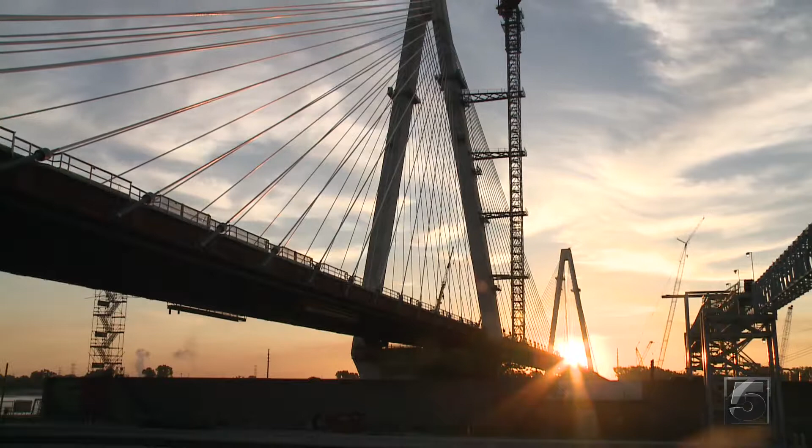It's a structure years in the making, a new gateway to the West. Like history is going to be here after I die, way long after I die. One generation's grand undertaking, built with muscle, sweat, and tears. He was a very good dad, very good son, and he was a very good worker. A tribute to a man who gave his best, and to countless men and women who represent America's best. Stan Musial and vets together, there's nothing more Midwest. Simply beautiful, strikingly complex. We could sit back and we could reminisce on, hey, we put that together. We poured that concrete. This is the making of the Stan Musial Veterans Memorial Bridge, a landmark of legend.

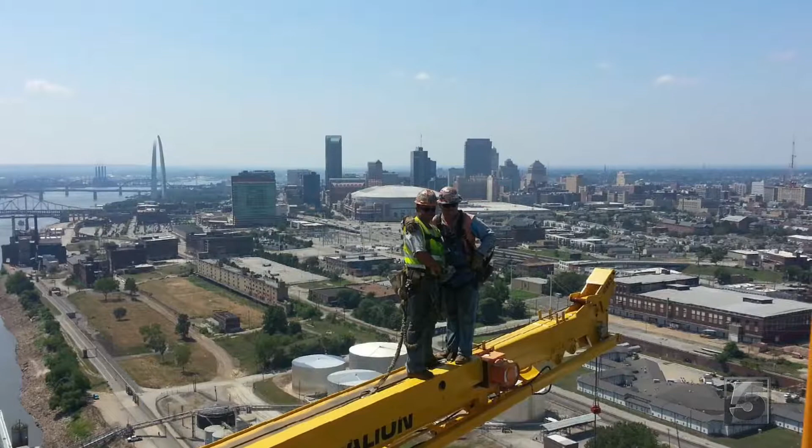On this day, they share a few photos. What do you call them? Glamour shots? Captured from their unique perspective. Pretty much when you're building something, you remember setting almost every piece of it.

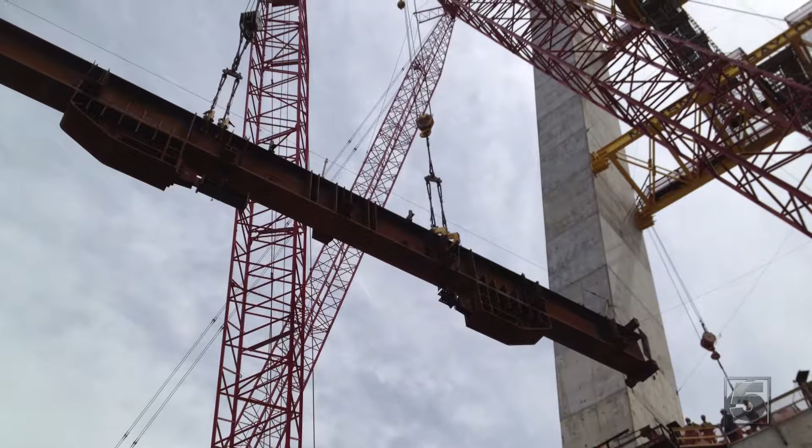Photos freezing moments of tension and suspense. You look at the numbers and it looks right on paper, but they were like 97, 98% capacity. 167,000 pounds, I think that piece weighed, and you transferred it between 3 cranes in the air.

Or just hanging out. I just got those two over there and they're talking. It's kind of neat seeing us, not in any kind of pressure, just kind of hanging out on the iron. Memories that will last a lifetime.

We had a family day down there, and I got to bring all my nieces and nephew up there with me, and we all got us some pictures up there. That was really, they kind of understood kind of what I did then.

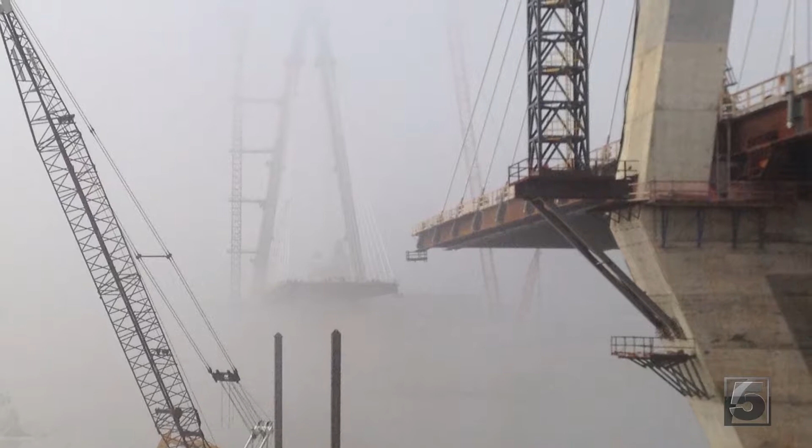A structure that will last for generations. And you always catch yourself when you're walking out to your truck at the end of the day, you look back and look up, see what you did, take a second and say, well, that was pretty neat.

The $700 million project started in 2010, right in the middle of the Mississippi River. But years before the bridge started to take shape over the river, there was work being done under the river.

It's late in 2010, and workers are busy laying the bridge's foundation. Their first priority, building coffer dams around each of the bridge's 2 bases. The dams not only provide a place to work, but also give workers access to their unique job site.

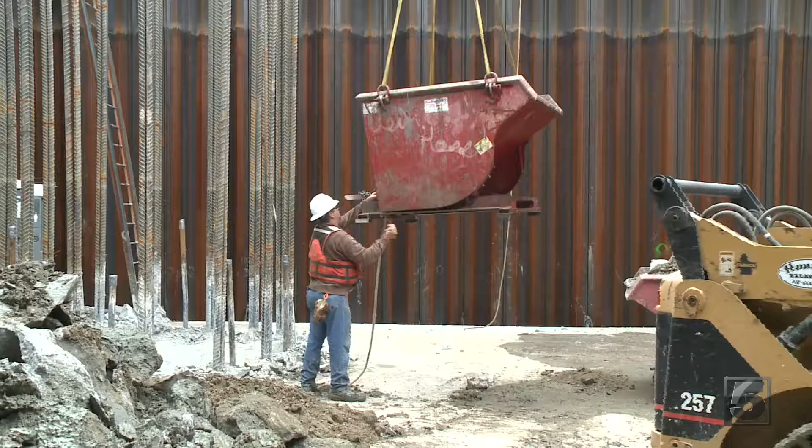Greg Horn works for the Missouri Department of Transportation and is the project's director. Right now we're at the bottom of the coffer dam. We're about 25 feet under the water. We're actually sitting on the floor of the Mississippi River.

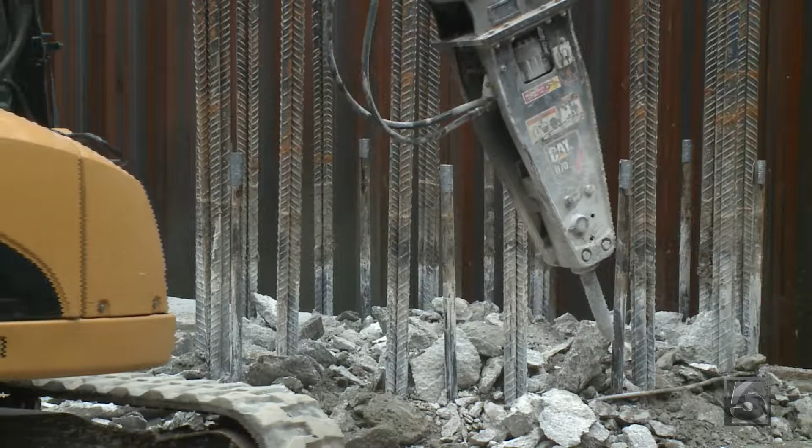Workers have drilled 6 shafts to support each tower. Tons of concrete, reinforced with tons of steel. They're 100 feet long. These clumps of 3, each one of those 100 feet long weighs about 2 tons. So when they set this in place, it's pretty amazing. They lower that down, and they have bands underneath that are all tied together every 1 foot, though you don't see them here.

Sheets of steel wedged down into the riverbed create a precarious workspace. There's always going to be water in here. You can never get these perfectly sealed, but by raising up this working pad, they're able to work on something without being stuck in the water all day long.

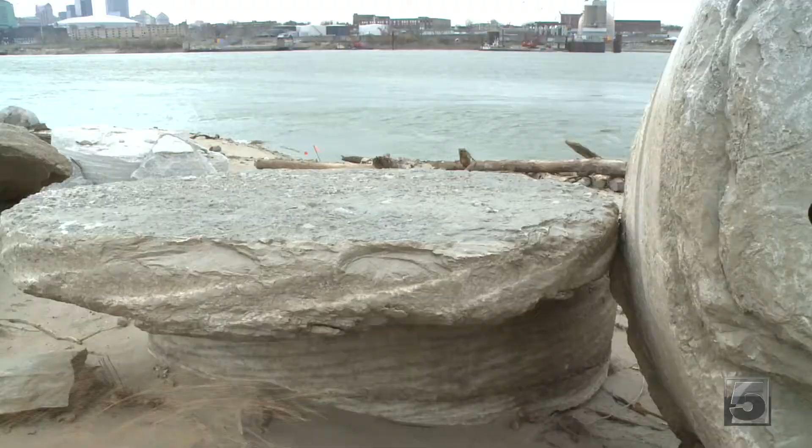Workers will spend months inside these coffer dams, constantly aware of the changing river levels and the risks they face. And so you're standing down there looking up. You can see the rust line when you're down there where the water is above your head.

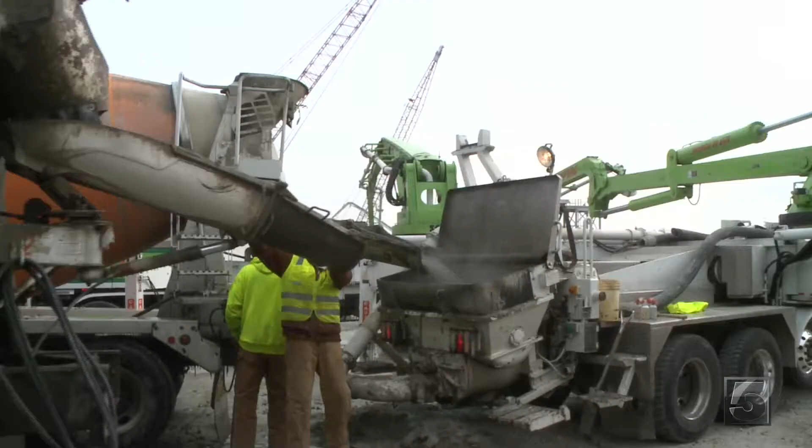And as the weeks wear on, the bridge's bases begin to take shape. Pouring concrete into the Missouri Tower seems like a never-ending process. They started last night at 1 o'clock. They'll end today probably at 3 or 4 o'clock this afternoon. So it's a 14, 15-hour pour.

And the December weather is just another reminder that Mother Nature can be a help or hindrance. Engineer Randy Hitt is the project's assistant director. Freezing rain and ice on the slippery barges makes it a little more hazardous, so a lot more caution has to be made to clean that off.

Despite the cold, workers inside the coffer dam are carrying out the task of creating an intricate form made of rebar. What you're looking at is approximately 1.9 million pounds of reinforcing steel, a lot of reinforcing steel to hold up all the seismic and weight of the bridge. When complete, these two towers will support about 31 million pounds.

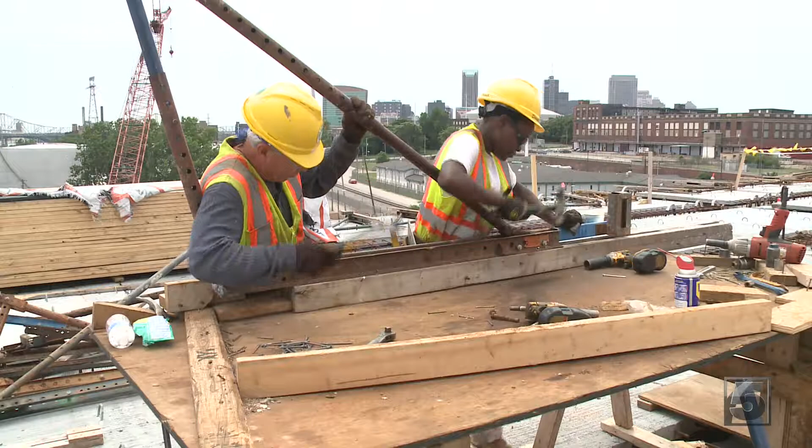As the towers of the new bridge begin to take shape, less than a mile east of the river, archaeologists labor to preserve what is old. Most of what we're digging are the remnants of everyday life.

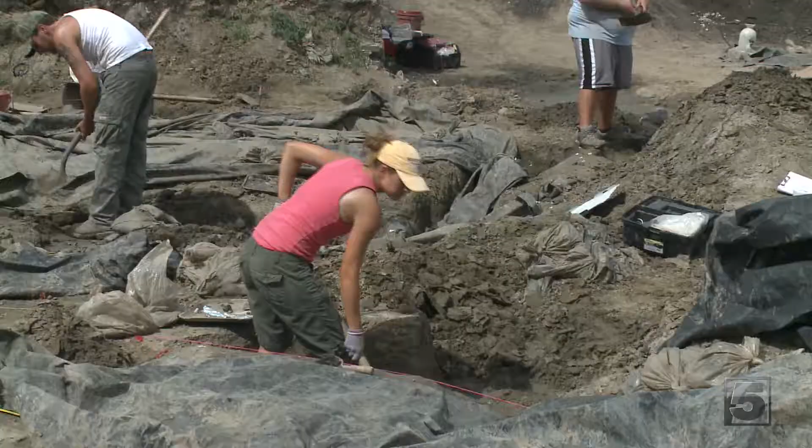Joe Galloy and crews from the Illinois State Archaeological Survey are fighting the clock. This is really sort of a once-in-a-lifetime opportunity because of where this bridge and the interstate connector is going. Thanks to a federal law that requires a dig be completed before the bridge is built, they hope to save what's left of an ancient community entombed on the outskirts of the Mississippi.

We're standing on the northern end of a large prehistoric site. We call it the East St. Louis Mound Center. Crews started excavating the dig site in 2008. It is a very, very slow process. They've spent years scraping away at the dirt, hoping to unearth the past that's buried here.

No site is exactly like another one. And in fact, the percentage of what we really know about these ancient sites is very small.

For Galloy, doing what he's passionate about in the state he grew up in is as priceless as the history being uncovered. One of the questions I get asked when I tell people I'm an archaeologist is, well, what are you doing here? They assume that archaeology happens in exotic places like Egypt or Central America or China. I think part of it's just a lack of awareness that there was a rich, ancient Native American civilization here.

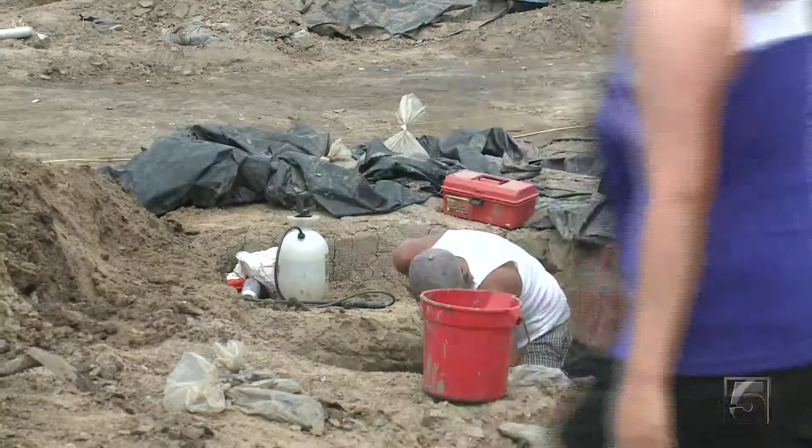Thanks to the dig, archaeologists now know that two separate groups of people at different points in history called the area home, the first between 950 and 1050 AD. The second group that came in were the Mississippian Indians, who built Cahokia mounds. The area was essentially a residential neighborhood, a suburb, so to speak, for a much bigger Cahokia.

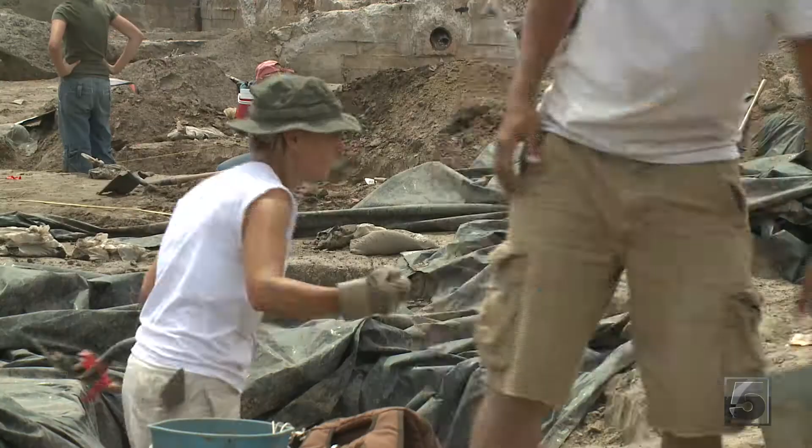That's an image that, in terms of archaeology, we just didn't know happened. It also backs up that even thousands of years ago, location was everything. We think it probably also functioned as a port city, an area where goods would come in and go out.

A few facts archaeologists may have never discovered if the new river bridge was never built. Finding these sorts of little tidbits of what happened helps produce a more complete picture of, say, how far Cahokia's influence was.

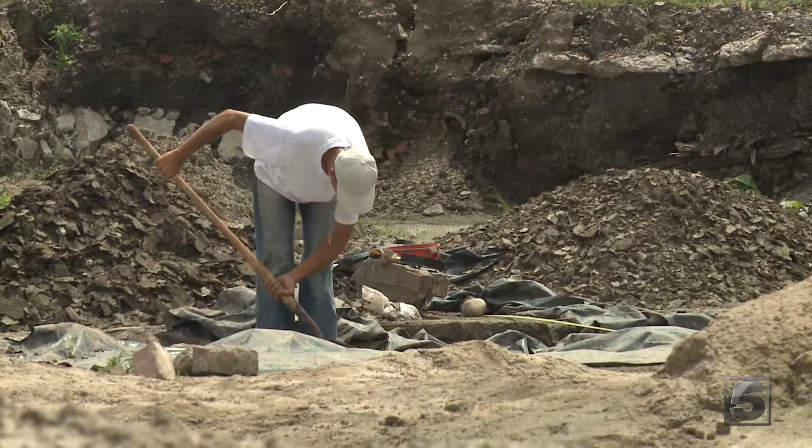The only problem is, the longer they get, the harder they are to ship. Constructing a monumental structure requires massive parts. Coming up, just how tricky getting those parts to the job site can be.

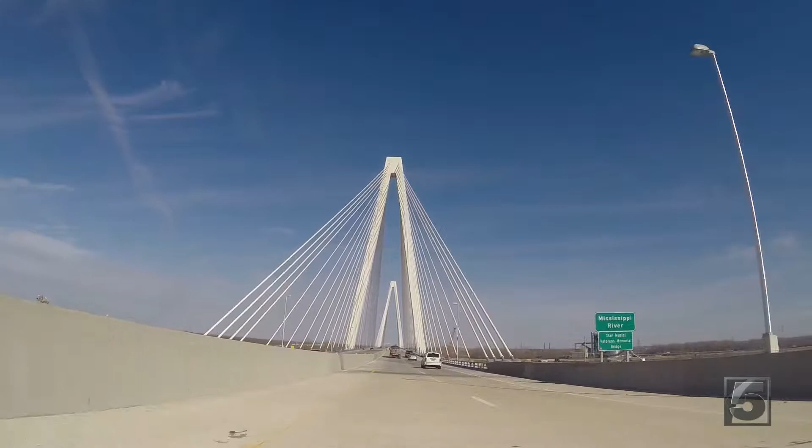The Stan Musial Veterans Memorial Bridge may be the newest bridge on the St. Louis skyline, but it's just one of many bridges in our city's history, from the McKinley Bridge to the MLK to the Poplar. Bridges were either built to get people into the city—over 100,000 people cross the Poplar Street Bridge every single day—or to relieve congestion on already existing bridges. It's a really great bottleneck, and now we see the problems that a bottleneck like that can cause.

But the city's first bridge was the St. Louis Bridge, better known as the Eads Bridge. Opened in 1874, it was built simply to connect the east to the west. Andrew Wanko is the Missouri History Museum's public historian. The Mississippi River had long been a difficult thing for people to cross, and steamboats were really the way to get things around. So this was incredibly monumental.

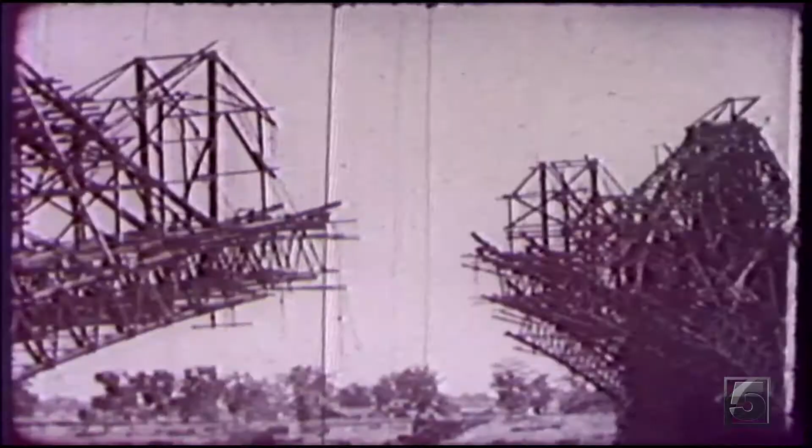The bridge was the brainchild of self-educated engineer James Eads. Considered a modern marvel, it was the world's first steel truss bridge. We look at the Eads Bridge now and think, wow, that thing is massive, it's strong, it's never moving. People looked at it back then and they were terrified of it. Since steel was a new structural material, people just weren't convinced it would hold up as promised. People were really afraid, and bridge collapses were pretty common at the time, even under the weight of just one train.

And so they were really worried this could be a huge failure and a black eye for St. Louis in the nation, a big embarrassment if this thing collapsed.

Eads, who never seemed to lack confidence, also had a knack for showmanship. He borrowed an elephant from a traveling circus and walked it across the bridge in front of a big crowd gathered on the levee. Everybody knew an elephant would never walk on something that couldn't hold its weight. And sure enough, it walked clear across to Illinois.

When the doubts lingered, Eads parked 14 locomotives in the center of the bridge at the same time. One by one, they drove off, and there were no problems at all.

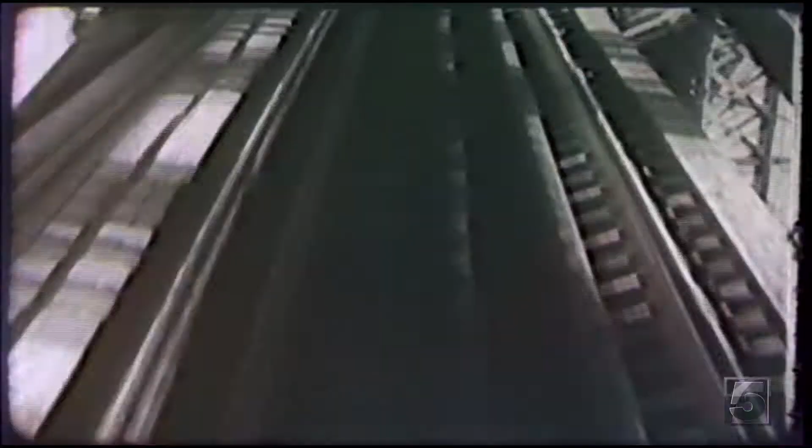The Eads Bridge originally carried rail and pedestrian traffic, but the railroads abandoned the bridge in 1974. By the early 90s, traffic had slowed to about 4,000 cars a day. In 1991, it closed, reopening two years later when Metrolink began using the bridge's lower train deck. The old bridge underwent a major renovation, and in 2003, traffic began rolling across the Eads Bridge once again. And the rest is history.

Once completed, the bridge will be the third largest cable-stayed bridge in the United States. And when you're building a bridge that size, just getting the parts to complete it is a very big job.

Building a bridge isn't just about building a bridge. You have to get to it to cross it. There are 31 construction projects, and it's all like a big puzzle. MoDOT's Greg Horn is in charge of making sure that each piece is put in the right place at the right time. This is just bringing one girder, one of 100 girders, onto this project.

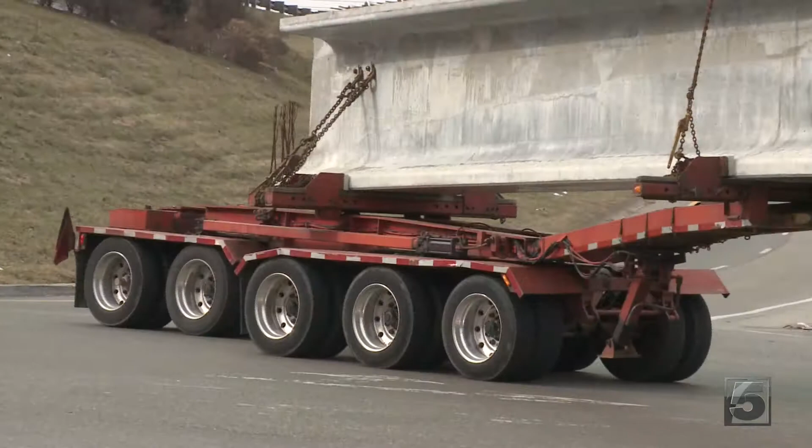In the spring of 2011, workers are maneuvering a 125-foot-long concrete girder from Interstate 70 down to the Missouri approach. The interstate's not as big of a problem as getting off at the interchanges and making it around turns. That's why the back wheels can turn also, so there's actually somebody in the front of the truck that steers the back, and somebody that steers the front. Horn says it's a move that will be repeated again and again.

Once on the job site, two crane operators work in tandem, lifting the bulky beam into place. Most girders typically only have one crane doing it, so the two operators have to work in conjunction with each other, which makes it more difficult.

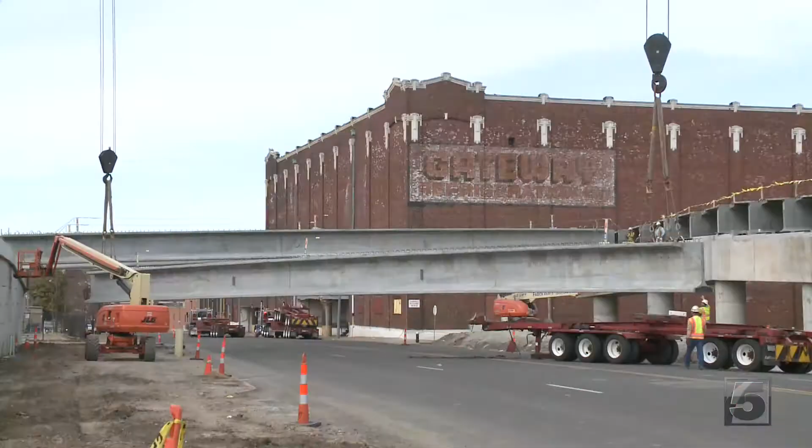Foot by foot, the crane operators negotiate their precious cargo forward. It's not a typical day's work, even for these skilled men. That's really hard when you have to walk with the crane rather than just boom over. Yeah, because then there's a lot of movement. It takes a good operator.

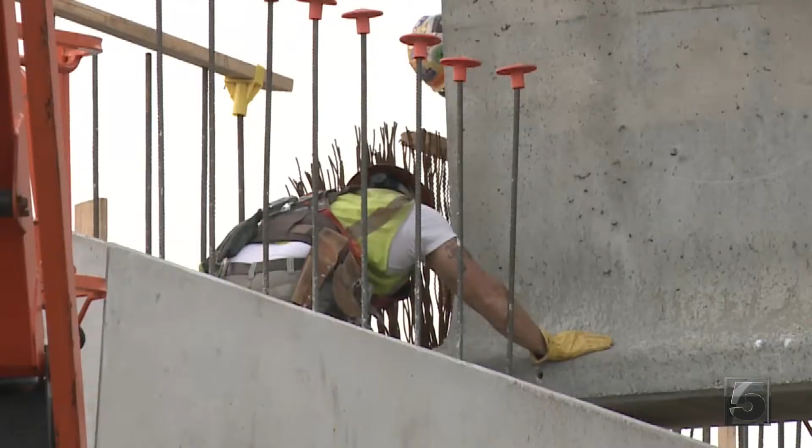More than an hour after its arrival, workers lower the beam into place. Teamwork is paramount. A lot of times crane operators can't see exactly where they're setting stuff down, so they have to look at the guys on top giving them hand signals. As soon as all the pieces are in place, work begins on another puzzle. It will be another four months before they pour the driving surface on the Missouri approach.

About 25 miles from the main construction site, in the heart of St. Charles County, right now we're taping this off so the concrete doesn't leak out, keeping it in the forms so that it won't fall and keeps the right level. Construction workers are putting in 8 hours a day, so when you're driving, you don't have any bumps.

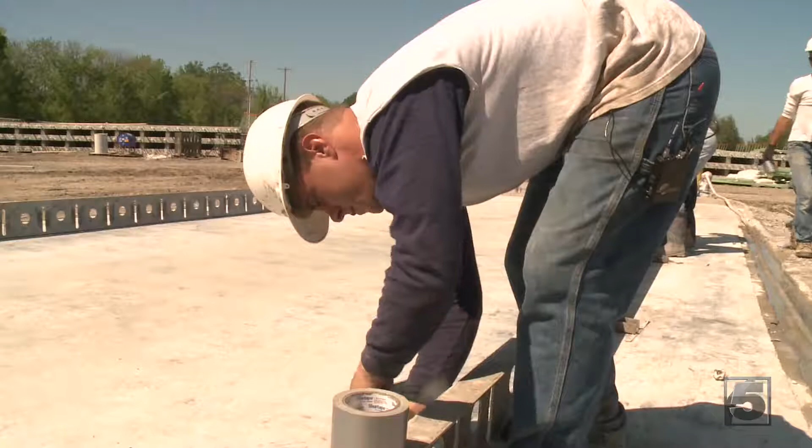Each adding his touch to the bridge. I've been building this bridge since last year. Ordinary guys like Dave Stewart and Andrew Leach tie wire, put it all together, bend steel and stuff like that, doing extraordinary things. They're part of the crew at XL Contracting, where workers are tying, pouring, and scraping.

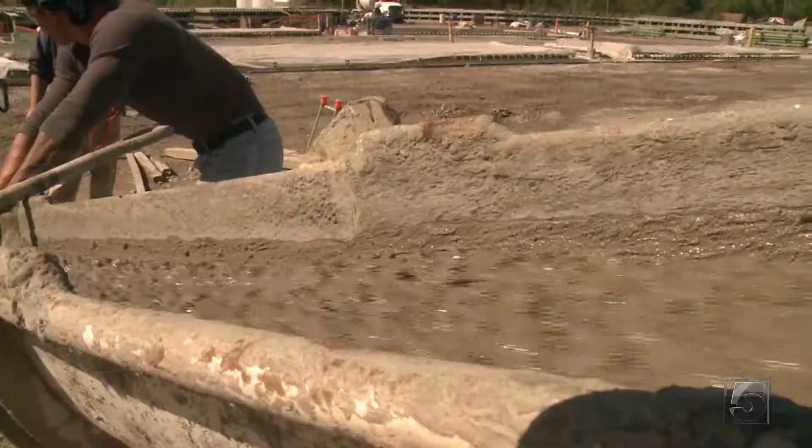Pete Allen is heading up this off-site construction project to build the bridge's underlayment. They are making precast panels, a lot of them, 456 total. There are 376 standard deck panels, some counterweight panels, and roof panels for the towers themselves, but 376 roadway panels.

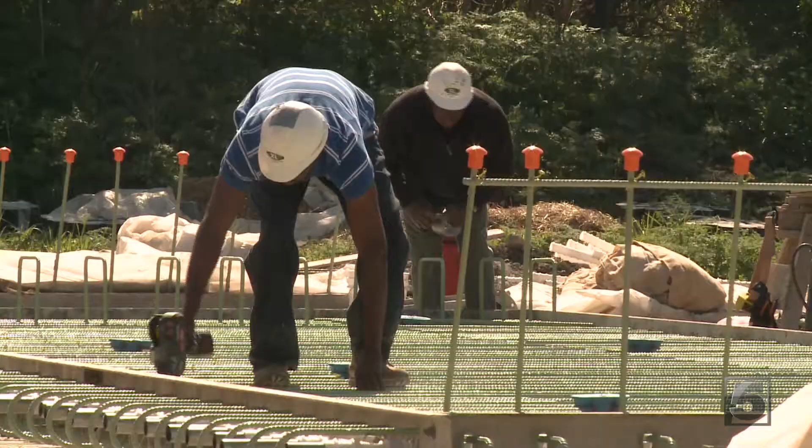Each panel is handcrafted and custom built for a specific place on the final structure. First, the form is laid out according to the diagram specs. Next, rebar is placed and tied off. After the work has been triple checked, the slab is poured and floated.

It's repetitive, painstaking work. We've hit as many as 14 in a week, but it's usually 8 to 10 a week, depending on rain days. But to these men, it's worth it.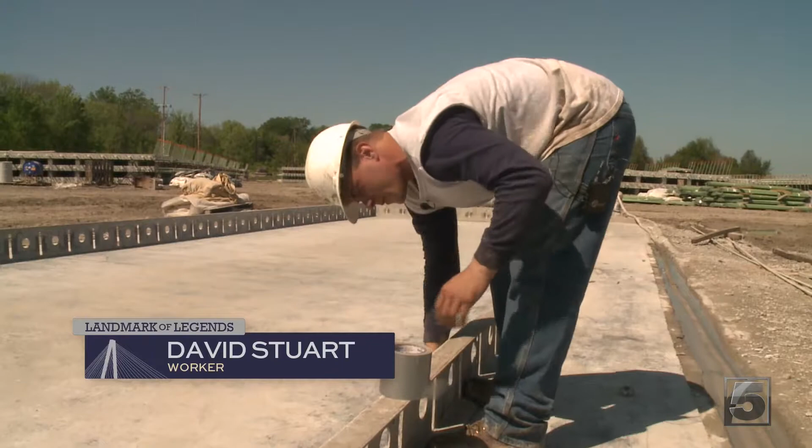They're helping to build history, especially when I drive over it too. Get to drive over and see that I made this. That's always good. Something you can tell your grandchildren you were part of, knowing you did a good job and that it's built safe for everybody else.

They all realize it's a once-in-a-lifetime opportunity. I'm still pretty early in my career as a civil engineer, and to be working on a project of this scale right off the bat—I'm 4 years out of school and working on one of the biggest bridges in the Midwest right here in St. Peters, Missouri.

It's pretty neat. Once completed, the panels are cataloged and stacked. The first ones built will be the last ones laid into place on the bridge's deck.

I saw how a bridge is being constructed, which is like a blast for me. Out of the classroom and down to the river. Coming up, engineering students get a glimpse of their future.

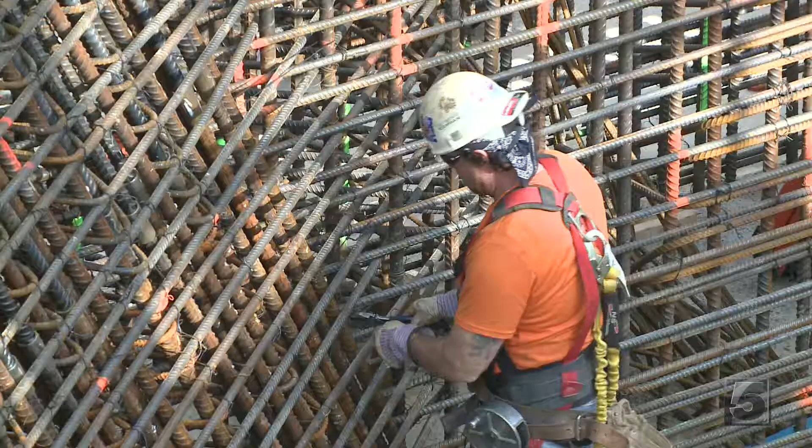It's early March 2011. The cofferdam is completed, and construction continues. The footing is poured. But now conditions are a little different—before, most of the other stuff was all underwater, and now we're actually coming above water. For the first time, the towers are beginning to take shape.

Now you've got the tower steel coming out of the footing, and they're getting ready to form up for the first concrete pour. For weeks, iron workers craft a steel cage, making sure each piece is perfectly placed. Small errors can quickly turn into large problems. It's actually like a big puzzle trying to fit all this reinforcing steel into place, trying to get it all lined up right.

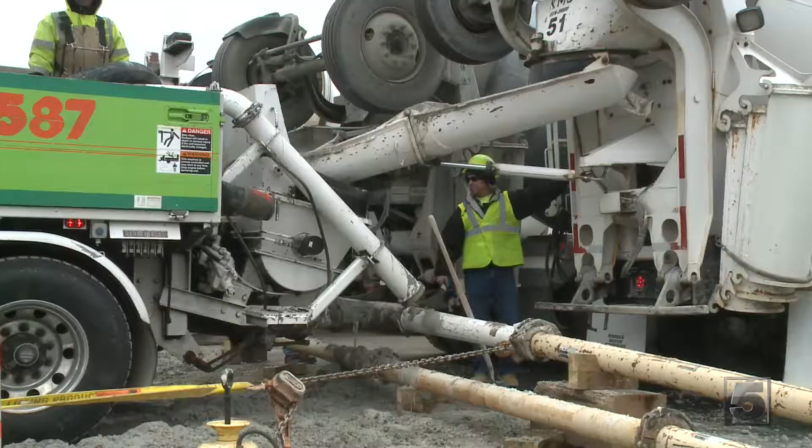A wooden form is built around the structure in preparation for the largest concrete pour of the entire job. Before it's done, workers will use enough concrete to pour what amounts to roughly 3,600 backyard patios—probably 400 truckloads, pumped from the trucks through a maze of tubes and into the cofferdam. All the people down there, you can't even see them—they're down in the bottom mat of steel, moving these hoses around. What took 2 days to complete will take 2 weeks to cure.

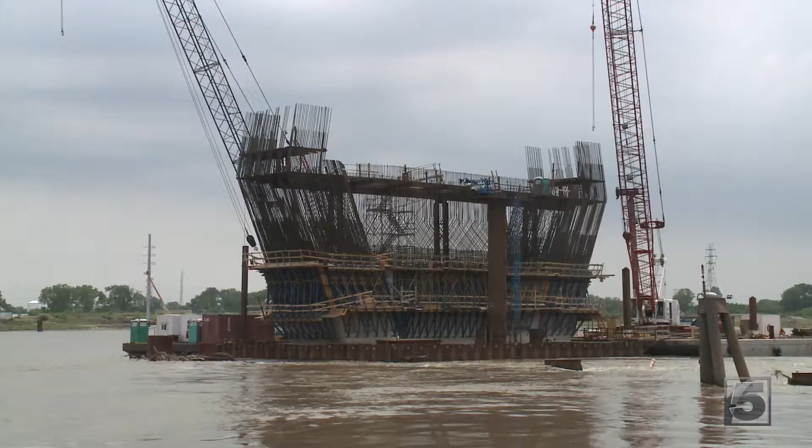It's a process workers will repeat 6 more times before the base is finished. They'll pour to this flat surface down here today, and then they'll tie more steel into it. The tower progresses up from there, so all this steel will be sticking out of the concrete. When this phase of construction wraps up, the base of the tower stands nearly 75 feet tall.

St. Louis hasn't had a new bridge since the 1960s. It's provided a rare opportunity for students who hope to one day build bridges of their own.

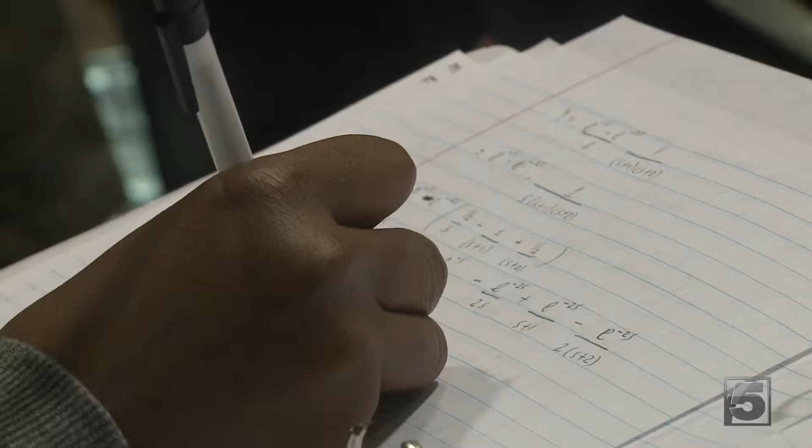For students in the University of Missouri St. Louis Washington University Joint Engineering Program, this would be a piece of cake. But today, the future engineers are leaving the books and blackboards behind.

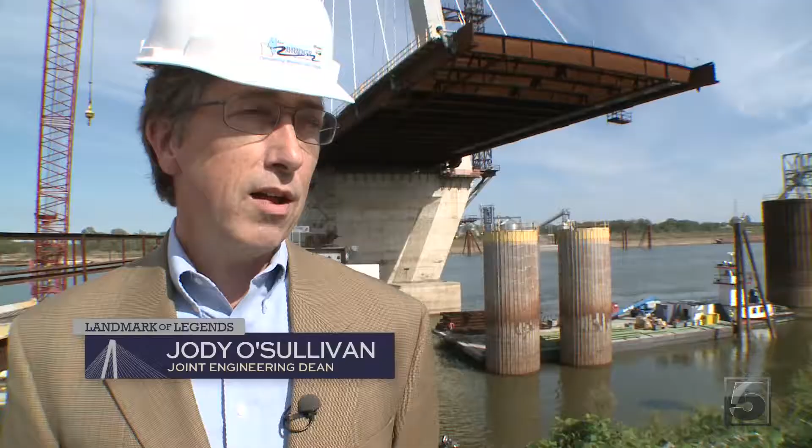So this is what the bridge is going to look like when it's done. Taking class on the road, this is a great opportunity for students in the Joint Engineering Program to come out and see engineering in action. Here's I-70—they're getting a firsthand look at what it takes to build a bridge, not only the design process, but the actual result of the design, the actual build.

It's a chance for civil engineering major Yahya Al-Assadi and other engineering enthusiasts to get a glimpse at what they hope will be their lifelong careers. When I decided to become an engineer, people asked me what I wanted to do, and I said I want to build bridges and buildings. So I tackled the first one today.

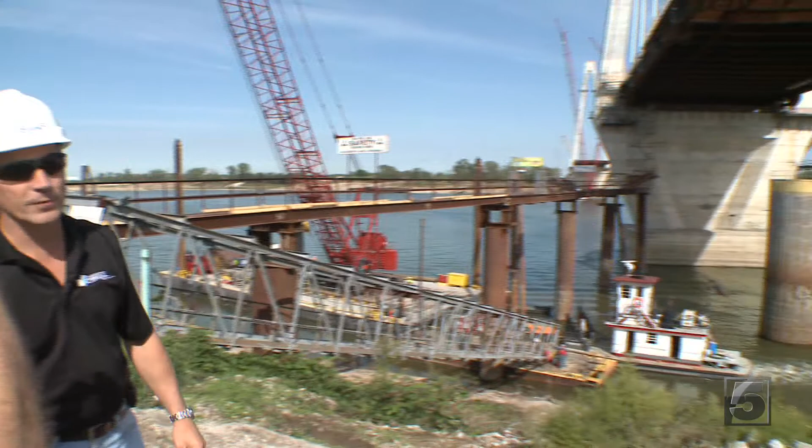The crane, that's a Manitowoc 7000. It's a 400-foot crane with a 60-foot jib, one of the biggest they make in the world. You don't see too many of those.

From large equipment to the smallest of details—studying it, reading about engineering is not enough. You have to come out and see what they're actually doing to put pictures with what you're learning. It's just amazing to me.

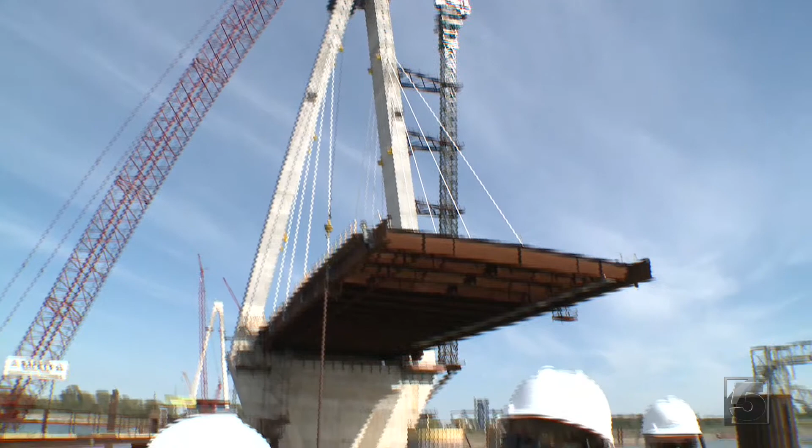To me, it's not just the lighting or the deck, or that it looks so cool—it's knowing the whole system and how this is going to impact St. Louis. From compression to stress to trusses, students get to apply what they're being taught. As an engineer, I immediately appreciate how much work had to go into this.

All the calculations, the planning. You could imagine how hard it is to start a bridge on two ends and then build it up to meet in the center and hope that everything is okay.

There's a different color in concrete as you go up the towers. Every aspect of the build piques their interest, even concrete. We had to have steel slag in that to help cure it, and so it looks a little bit different.

It's something you just can't get in a classroom. To see a bridge being built is a unique opportunity, and we're thrilled that our students had the chance to come out here and see this. And for some of them, watching from the sidelines just isn't enough.

But I was hoping we'd go up there and actually look on the bridge. That would have been a treat for me. It was very exciting to be here and to see it hands-on. I wish we could be closer, but I'll get what I can take.

About 60 students graduate from the Joint Engineering Program each year. Most of the students are from St. Louis and will stay right here.

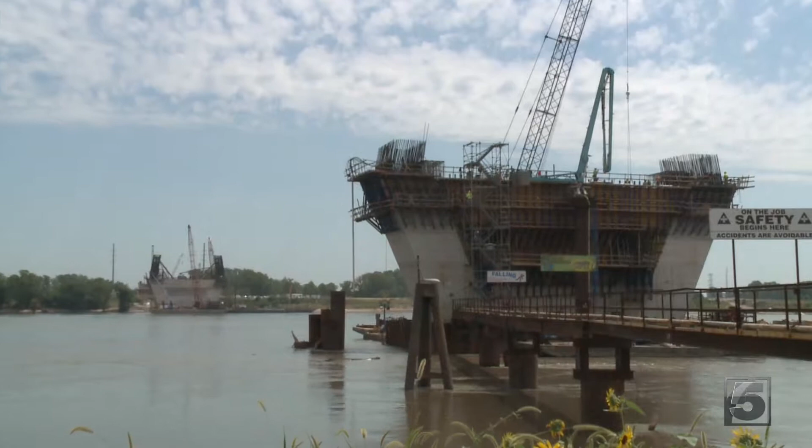It's late summer 2011. The bridge's bulky base is in place. Everything up to this has been a foundation. As excitement grows, in another couple months, you'll be able to see it from different places in St. Louis, and workers begin to look up.

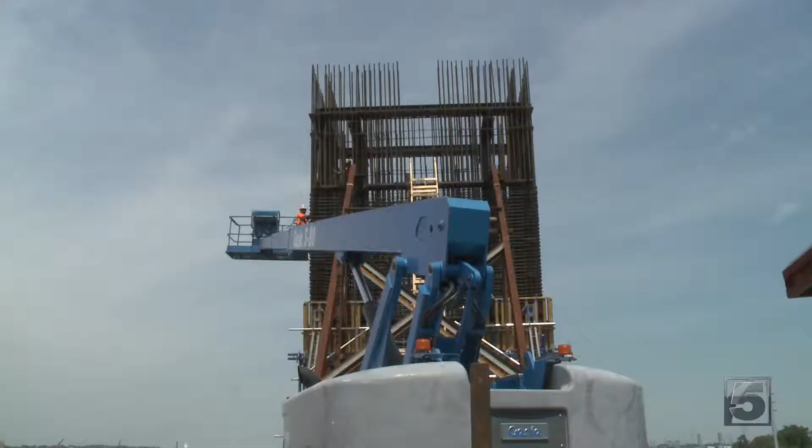Engineers have budgeted almost a year to complete the towers, and despite river levels being high, we lost a few days, but we're still on track for an early 2014 opening. It's a schedule Project Director Greg Horn intends to keep, but one that will be challenged in the months ahead. But for now, with machines and muscle, progress comes 15 feet at a time.

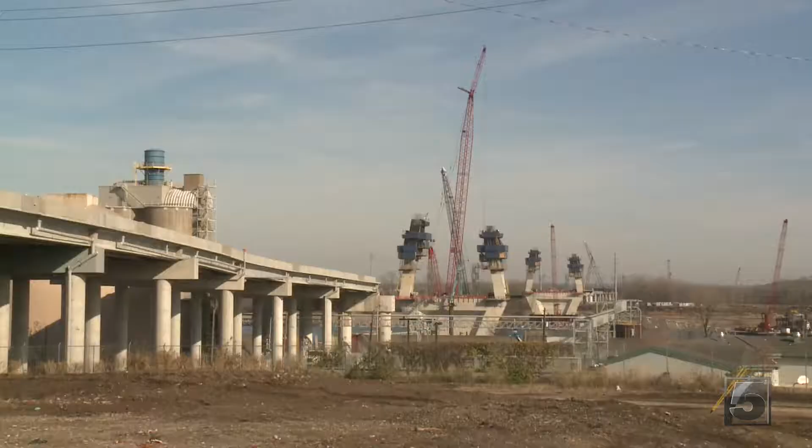By winter of 2011, we're about 175 feet in the air. The job is at its halfway point. The construction is going fabulous. The river has been cooperating for this last six or eight months.

But with the cold comes uncertainty. And the higher up they go, when you get up there on a windy day, it's really hard to get stuff, have the cranes lift stuff up. There's been a few days that we've had to shut down because of the wind.

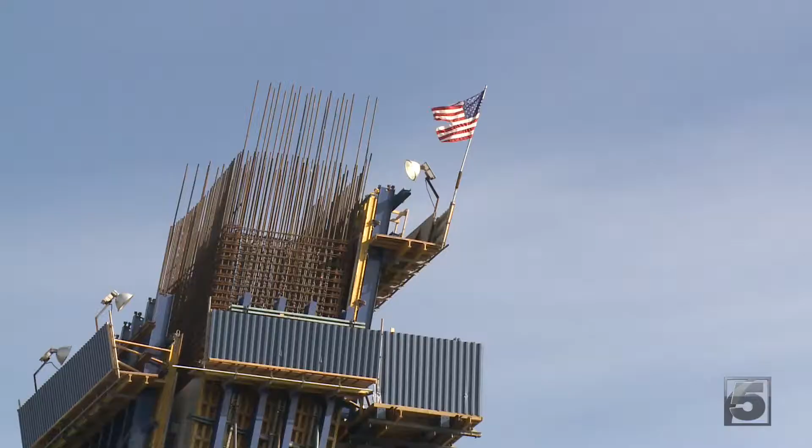Up to this point, the towers, filled with rebar and concrete, were solid. From here on up, they'll be hollow, giving future maintenance workers access to the top. And there'll be a ladder on the inside for somebody, when we're done with this thing, to climb up, change light bulbs on top.

Carpenter Chris Wilson is no stranger to the big job. Yeah, I worked on the Clark Bridge. Worked on the football stadium over there, the ballpark.

He's grown used to close quarters. It's real challenging working in that core when we go to strip and roll the forms in. It gets really tight, not a lot of room to move around. But he takes it all in stride. I'm just here for the exercise and the camaraderie.

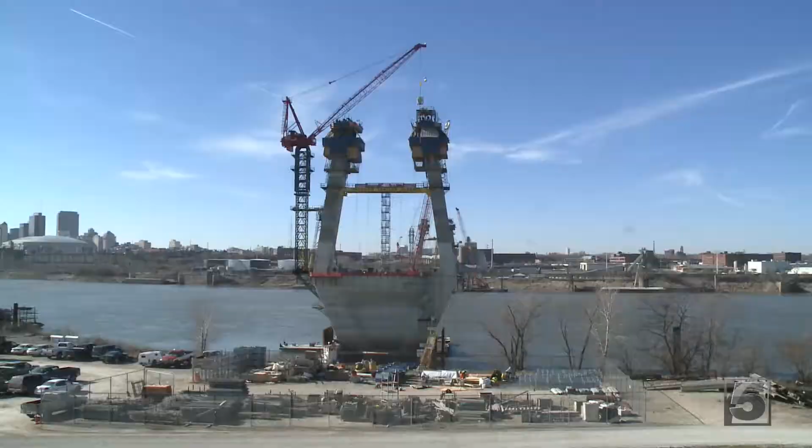When the towers reach just over half their height, gigantic metal boxes are fitted into the core to help anchor the bridge's support cables. As the cables go through there, they get tensioned up, and then there'll be a white conduit that goes over. There's probably about 72 cables inside of there, and then the white conduit goes over the whole thing and comes right on through the side of the pier here.

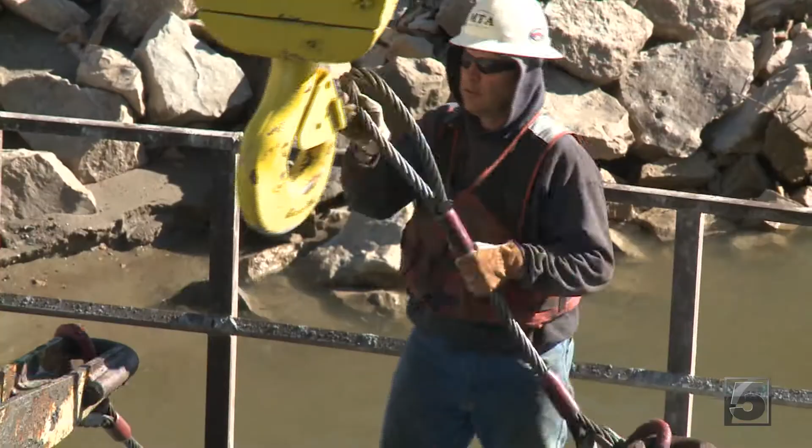One by one, gigantic buckets of concrete are hoisted to the heavens, and foot by foot, workers approach the atmosphere. We're about 370 feet in the air. We're on the Missouri Tower.

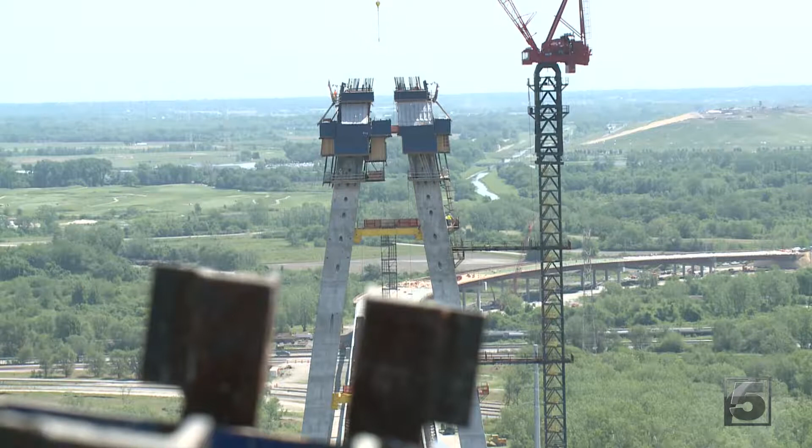Finally, in mid-May 2012, the tower legs stand a mere 10 feet apart. So you can see on the right is the downstream, and on the left here is the upstream leg. They're going to pour this piece tomorrow, and then we have two more pours on top of that to connect these two together. So within three weeks, we'll have this thing topped out.

He was great, yes, and what he put into it with his heart. He was a worker with a passion for building. Coming up, remembering Andy Gammon, a husband, father, and son - the man who lost his life building the Stan Musial Veterans Memorial Bridge.

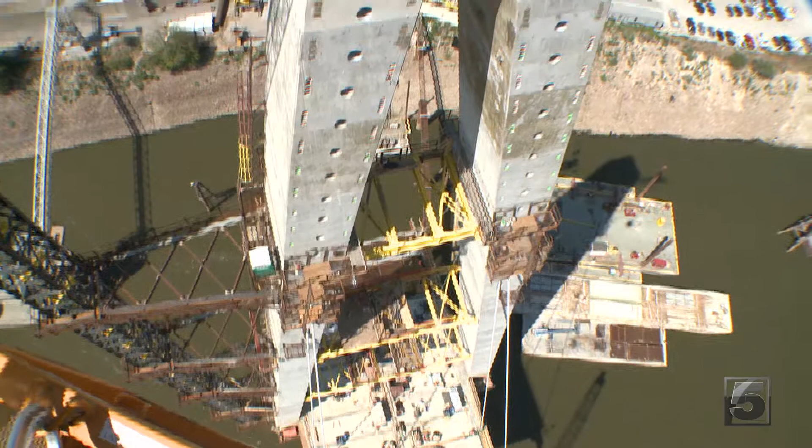It's the middle of August 2012. The towers are topped and work has begun on the bridge's main span. The span between the two piers is 1,500 feet, making it the third longest cable stay bridge in the United States.

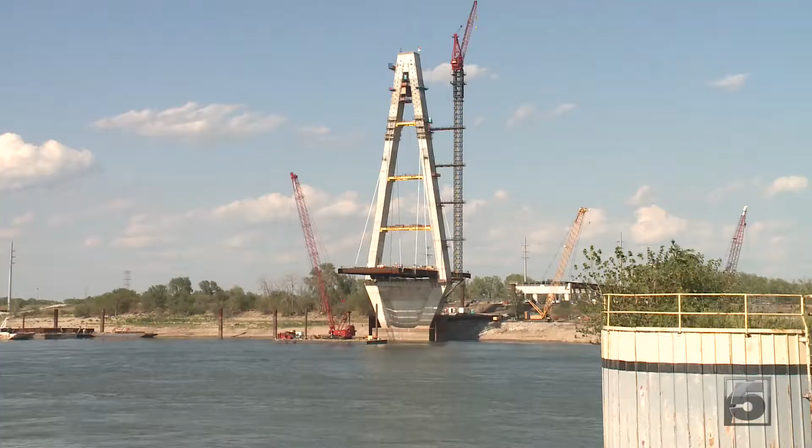The plan is to lift pre-assembled field sections from the riverbank and attach them, building out evenly on each side of the towers. Under the best of conditions, it is an epic balancing act. For the next few months, we'll be closing the gap in the river with both sides going out at about 130 feet a month.

It doesn't take long before Mother Nature has her say. A hot summer with little rain results in low river levels, something bridge engineers hadn't anticipated. The problem is the water's low enough that we can't get barges between the Illinois bank and the Illinois pier, making it impossible to float the massive field sections into place. Since they can't do that now, they have to build those in the air piece by piece, and that takes a little bit longer than they had planned. Despite delays, engineers still anticipate an early 2014 opening.

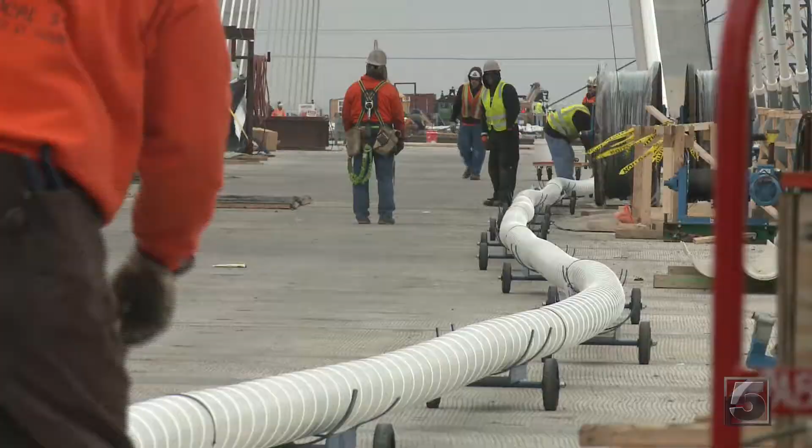December 2012. A large sheath of conduit is rolled into place. It doesn't really have any structural value. All the cables inside of that is what holds the bridge up. Each cable on the inside is about the thickness of a nickel. The number of cables in each conduit varies. We started off with 23 cables at the very beginning, and by the time you get all the way to the end, you'll have 76 cables. It's enough cable to stretch from here to Kansas City and back.

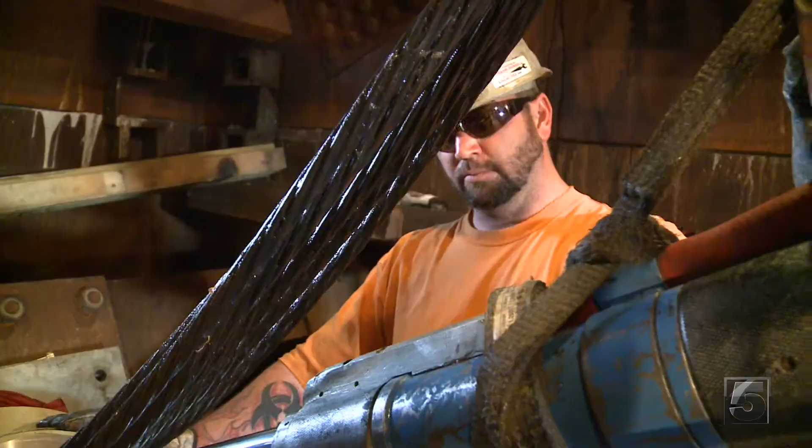Inside one tower, workers pull the cables, each cable's tension specifically calculated for the amount of weight it will bear, then simply wedged into place, securing hundreds of thousands of pounds below. Ready for liftoff. All right, heading up in the man basket.

A month later, the new year brings new perspective to the construction. So we're about six cables from the top. We got 17 altogether, so we're over two-thirds of the way down with the cables. Standing atop the Illinois Tower, looking west, the span creeps toward the middle of the Mississippi. And we hope to have this whole thing completed by about a year from now.

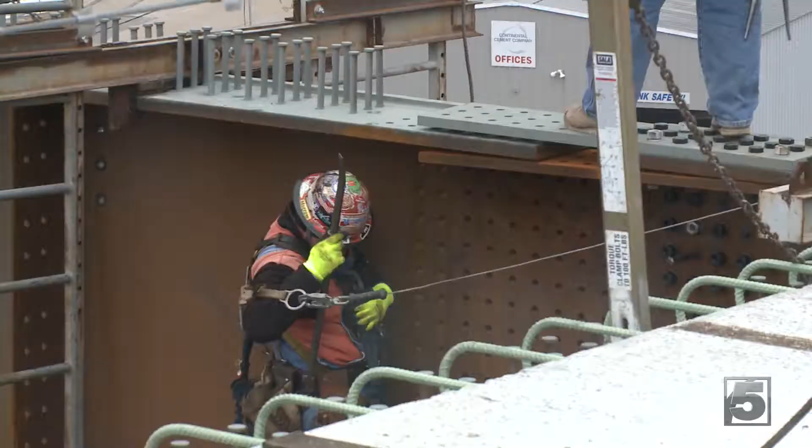A few weeks later, another check mark. The girder connecting the main span to the Missouri approach slides easily into place on one side, as the crane operator gently lowers the other side into place. I got 4.5. Workers check to make sure the beam is centered properly, and when they are satisfied, the Missouri approach is successfully joined with the main span.

Building this bridge has not been without sacrifice and tragedy. 35-year-old Andy Gammon of Park Hills was killed in 2012 when the lift he was working on fell into the river. His family believes his work was not in vain.

This one was of him when he was four years old. Family photographs are now more precious than ever to Andy Gammon's parents, Susie and Ed. Andy was a carpenter by trade, and the Gammons say even as a little boy, Andy loved to put things together. He played with blocks a lot and did things like that. And when he got older, some of his drawings were like about houses and things like that.

Those years moved fast, but his folks said he blossomed as an athlete. He was a standout center fielder at Central Park Hills High School. His senior year in high school, he batted .500, and probably 90% of his hits were infield hits.

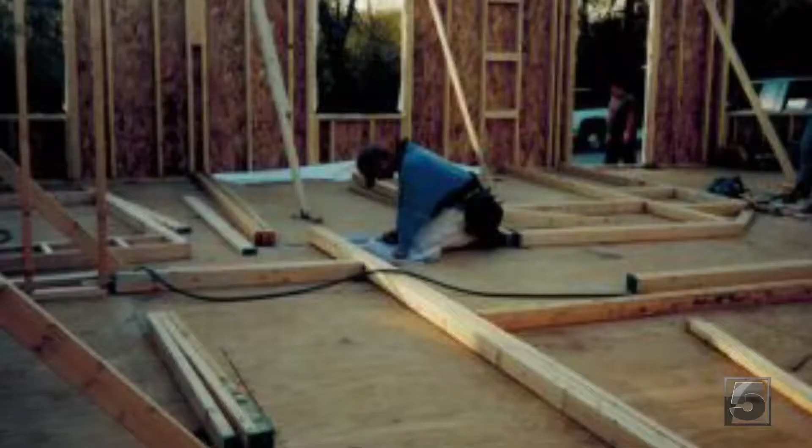Despite a baseball scholarship, Andy's parents said college really wasn't for him. It was building that captured his heart, so it became his life's work. He was a perfectionist. I worked with him some when he'd build a house, and we'd get into it. You know, well, his first house he built, I'd make a suggestion. He said, 'Dad, I do this for a living. You just carry me some lumber over here and I'll do the building.'

Andy married, had children, and his parents say he cherished his time as a father. He wanted to work close to home, but it wasn't always possible. He worked a lot of hours, driving back and forth to St. Louis, but he came home on weekends, and he just hated that. He hated being away from them.

More than building homes, more than baseball, Andy's children, Emma and Ethan, were the center of his universe. When they went riding in the car, Ethan had to sit right behind his dad. That was his spot to sit, nowhere else. And then Emma came along, and it still was that way.

On the night before the bridge opened, the Gammon family attended the memorial ceremony with hundreds of others. One, two, three.

Theirs, though, was a different kind of pride, and they hope Andy's legacy will be simple. He was a great person and a hard worker. Anybody who's been around him knows what kind of guy he was.

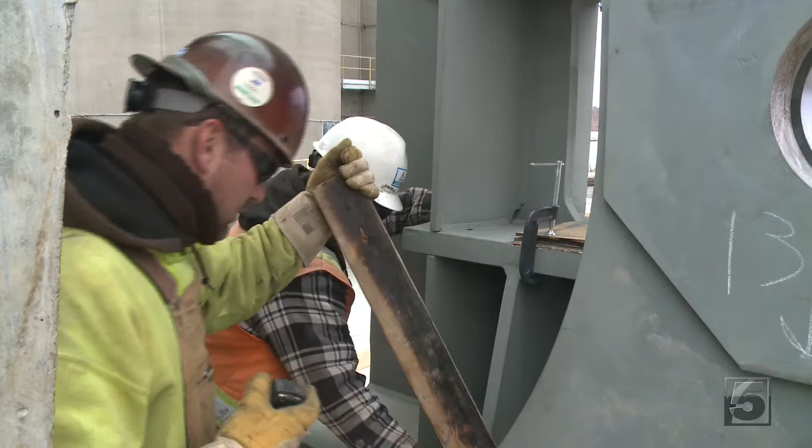Greg Johnston wasn't supposed to be an iron worker. My family was all pipe fitters. I'm the first generation iron worker. But when he was 12, a friend's dad took him to the iron workers picnic, and I saw what they were doing, and ever since then I wanted to become an iron worker.

A choice that's taken him all around the country. I spent a year in South Carolina on a nuclear facility, six months in New Orleans on a Seabrook Gate project. But this July day finds him at home, right in the center of the action.

Hold that, Scott. Workers are preparing to hoist the final piece of iron onto the bridge. It's a difficult process, but after a false start to free the flag, good job, Captain, the final piece is airborne and headed for home.

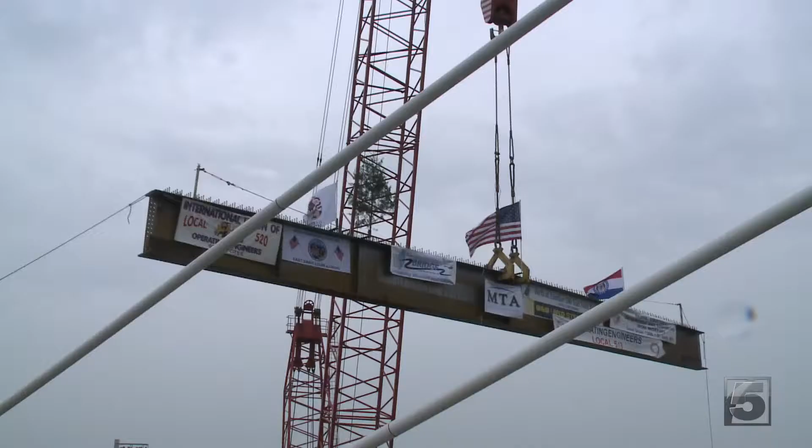Hey Scott, I'm going to stop you once you get off the road deck. We're going to grab that leading tag line. About 8 more feet. Swing into your right.

Tension mounts as the beam approaches the bridge's structure. There's little margin for error as the crane operator blindly maneuvers the girder up over the bridge's cable. Let's hold your swing there for now, Scott. Straight boom down, 20 feet. Across the deck. Start working down on your line, and down into place. Keep coming down and hold that.

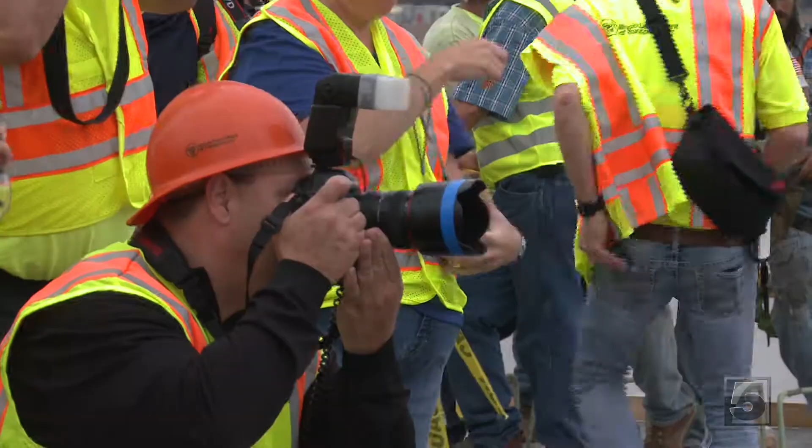As Greg and his fellow ironworkers take their turn in front of the camera, and pause to autograph their handiwork. Thanks. Loving the signature, baby. You like that? I like it. It's the same always, baby.

They know the most delicate part of the job lies ahead. All right Scott, coming up on your line. We're on here about 4 or 5 feet. Workers must place the gigantic beam between the two edge girders. It's a tight fit. Keep coming down, looking good.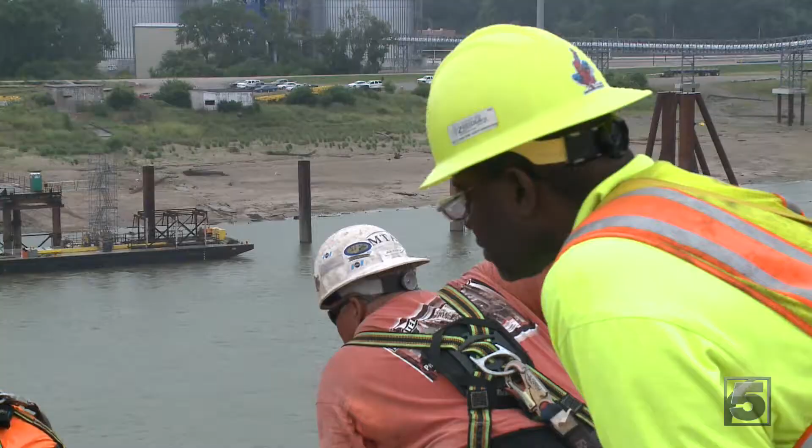They hold their breath as the beam is lowered the final few inches. Coming down. Hold that. When workers hammer temporary pins to hold the girder in place, Johnston breathes a sigh of relief. No fighting, baby, no fighting. A once stubborn structure - I can't believe it fell in like that. We fought so hard on all the other ones, and that one just fell in.

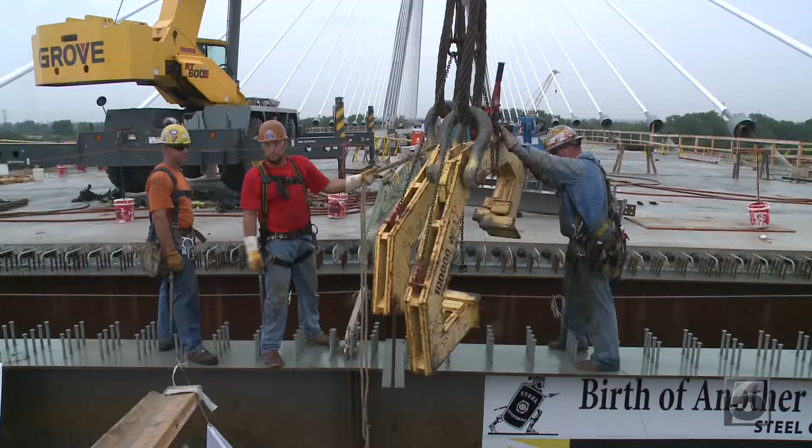Now tamed. We talked about it all morning. We took a lot of measurements to see what it was going to be like, and it was going to be close, really close. And then I guess the weather was right. One more job Johnston and his fellow ironworkers can be proud of. Whether you're building this or a building, every day when you leave, you look back and you can see it growing. It grows and grows. You get to see a new horizon every day.

As the bridge neared completion, it was time to party, or at least picnic. So one summer afternoon, workers got the chance to show their families what all this fuss was about. Learned a lot, you know, that I'll never forget.

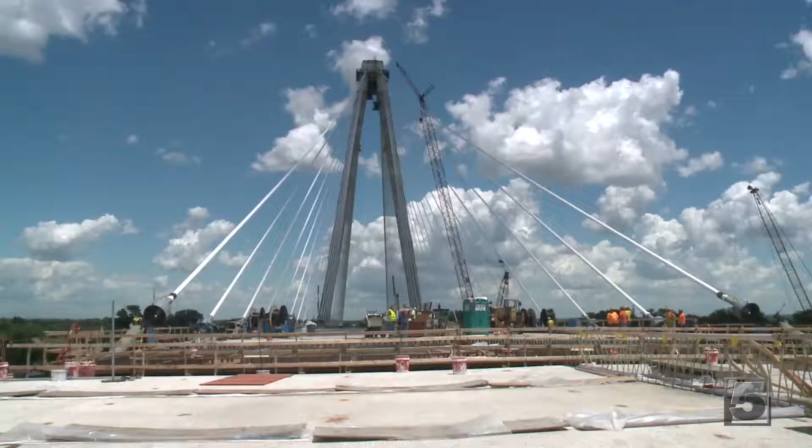Carpenter Lynette Bryant is celebrating. Not only was she grateful to be part of a historic moment, but is so happy the job meant so much to her. It was amazing, you know, how fast we caught on and how fast it went up. Bryant says she still can't believe she was a part of it. Every day I just look and say, wow, I'm going to be a part of history. You know, it just amazes me every day.

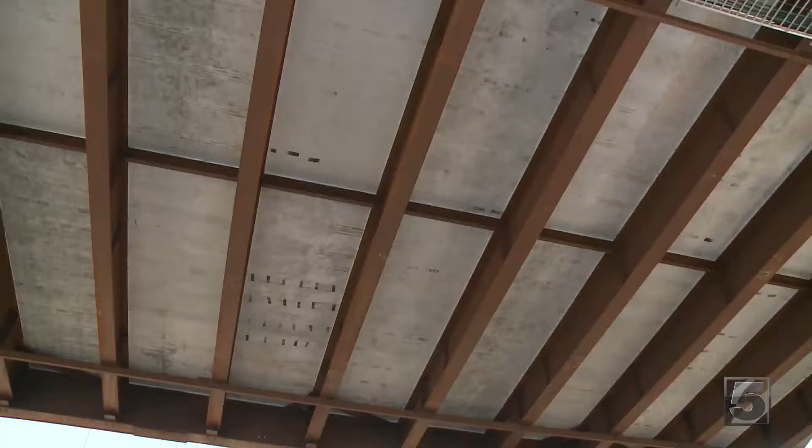Bryant was with dozens of other workers and their families who spent the afternoon in the shade of the bridge, reminiscing about what they've built so far. It'll be a memory because I live in this area.

Crane operator Lance Miller had another reason to mark the day. It was the end of a 34-year career. This job, though, among his most memorable. It's been a wonderful job. I mean, I've worked on, well, I did the McKinley Bridge up north, but this one here, it's a brand new bridge. It's been quite a job.

Miller says there was stress and challenges along the way, but he and his co-workers can look back fondly. Proud, no doubt. But I'm still glad this is my last day. It's been a long time.

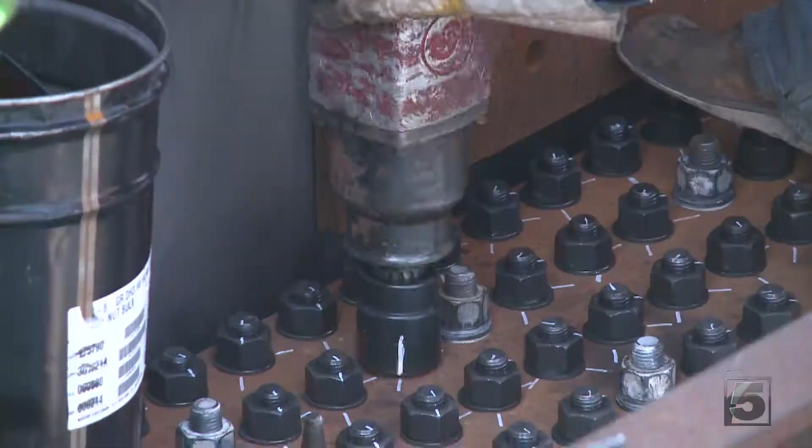Though Lynette Bryant hasn't been at it nearly as long as Miller, her time on the project represents so many different things. It makes me feel like times have really changed to where they don't look at me as being a woman. They look at me as being one of their co-workers, and I appreciate it. They give me the respect that I deserve.

It's just one of the many memories that will stay with her long after the bridge is finished. Like, wow, I'm building this. In years to come, I can look at it and say, I was a part of that. Just make myself proud.

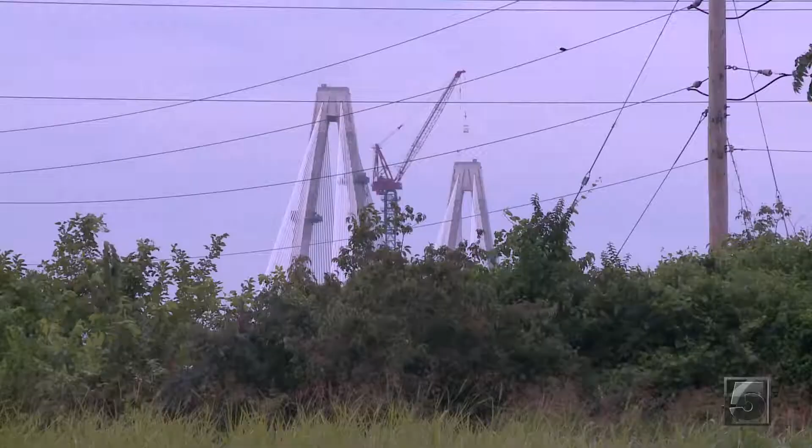Once the bridge's towers pass the midway point, they're an addition to the skyline that can be seen from all over town. Vinny Guldani is keeping an eye on the bridge's progress from the fairway at Gateway National Golf Links in Madison, Illinois. The views are great. We get quite a few holes that we look right back into the city, great views of the arch. You really can't beat it.

He noticed parts of the Stan span finally peeking over the trees a short time back. Seems like every few weeks the view kind of changes with different machinery on the bridge, and as the seasons change, the views change. So sometimes, like now, we don't get the best view of the bridge, but whenever the leaves start falling, we get to see right through and see all the guys hard at work.

And he's not the only golfer that's noticed. Amazing, you know, when you sit here and you look at it. Even miles away and partially built, the bridge is hard for Paul Spotansky to miss. You really don't get a good perspective of what's going on until you get close by and you see the amount of work and the heavy construction and basically how high those guys are working up in the air.

A first for Spotansky and a first for the St. Louis skyline. St. Louis has a beautiful skyline with the arch and all the high rises, but adding the bridge can't do anything but make it even prettier than it is.

But it's not just the new addition to the skyline Guldani looks forward to seeing. Reducing traffic on the Poplar is sure to make it easier to get in a round of golf. Absolutely, you know, I kind of work my golf game around the traffic that I think is going to be on the Poplar.

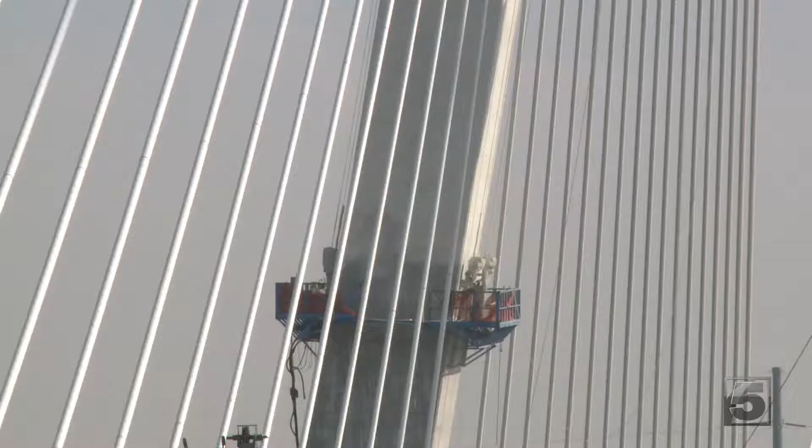It's the middle of September 2013. Opening day looms just 4 months away, and there is still plenty to do. Putting up the railing from the outside, electrical work, a lot of miscellaneous things. We'll see after the overlay is on if we have to do any final cable tensioning.

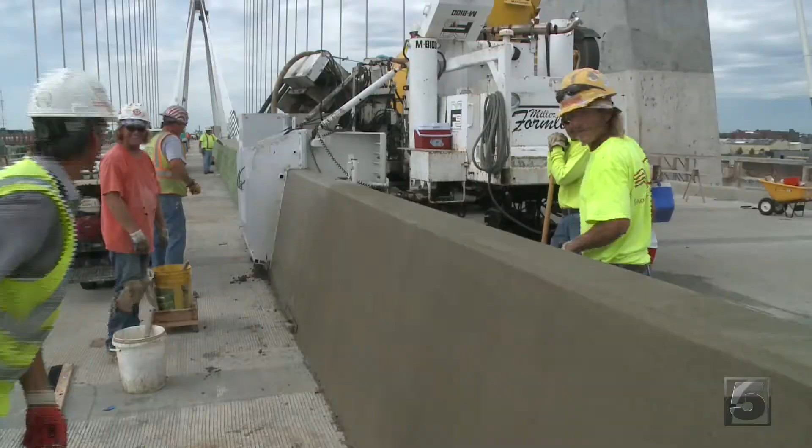At one end of the bridge, workers are building the form for the center median. At the other, it's being filled. It's a process that moves at a snail's pace on this hot September day. It's just another check mark on what seems like the ultimate to-do list. Things don't wrap up like this by accident. It's all a lot of planning, a lot of coordination meetings with a lot of different folks. The bridge must still be painted.

And the driving surface poured. As construction creeps towards completion, engineers look past the ribbon cutting, when the bridge will finally do what it was built to do. So we have a huge cleanup to some of our traffic messes, which is going to be hopefully an economic boom to the community.

Finally, in early February, another milestone. But tonight we wanted to give a little preview of the bridge for you to see. A small crowd gathers on the bridge for the formal lighting ceremony.

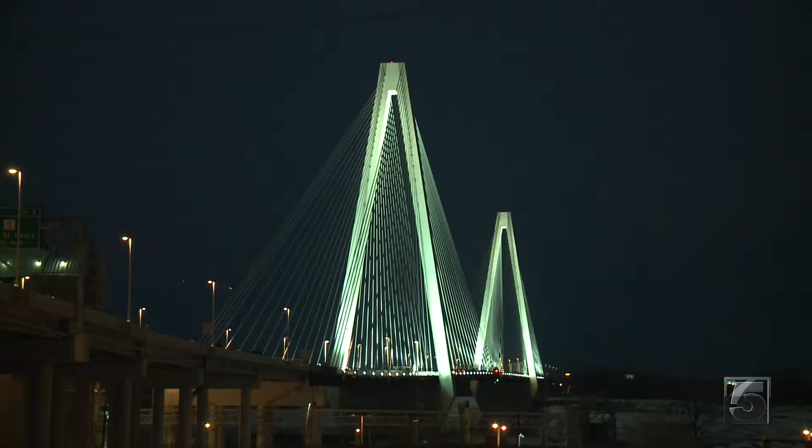This is a perfect tribute to such a beloved man and athlete in the St. Louis area, to name this bridge after him, and so many veterans who have risked their lives so that we can have our freedom. And with the flip of a switch, 3, 2, 1, go! The Stan Musial Veterans Memorial Bridge illuminates the St. Louis skyline for the first time.

It also took an act of Congress to name the bridge after Stan Musial and our veterans. For Cardinal fans and Stan's family, it's a mammoth memorial for a man who was larger than life. On this cold February day, Brian Schwarzy climbs to the top of a bridge honoring his grandfather, who climbed to the top of his game.

No one left a mark on Cardinal baseball like the beloved Stan Musial. With wind howling and temperatures dipping, Schwarzy celebrates with some of the men who helped build the bridge that bears Stan's name. The magnitude of the project and the view is not lost on anyone.

The two states really came together and decided that it was best to be named after the veterans and Stan Musial as well, which I think is a great fit. But to see this awe-inspiring bridge behind me is something to be seen.

Sullivan's first pitch to Stan. It's swung on, a drive back into right field. Schwarzy says the structure is a fitting memorial because Stan the Man was such a bridge builder in life.

He was always a man. I mean, he saw through all the black and white and everything, and just saw people as people.

The Musial family believes the new bridge may be the perfect symbol for baseball's perfect knight. I don't know a public figure that's more in tune to a city than Stan was. I mean, he really was what's so good about St. Louis, was also what's so good about Stan. He's just, it's a family town, and that's what he was. He was a family man. He was loving, he was caring.

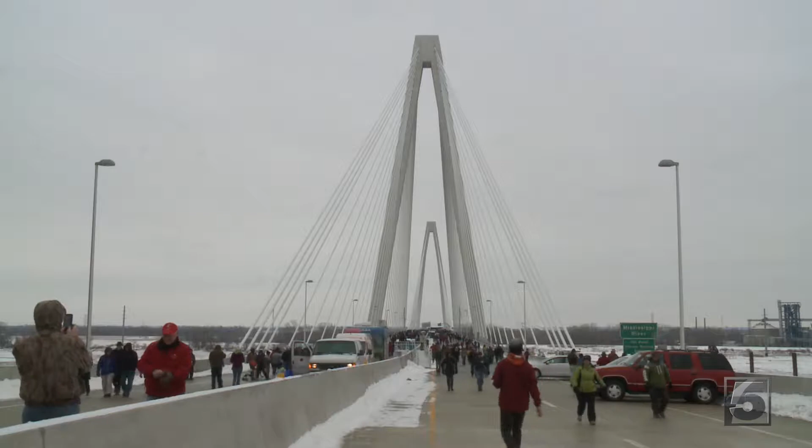Welcome to the ribbon cutting ceremony for the Stan Musial Veterans Memorial Bridge. On a cold February morning, thousands of people took advantage of a rare opportunity to walk across the new bridge.

This is the place to be. Everybody's here. Some came to pay tribute to our veterans who sacrificed for our freedom. Others wore their cardinal red, honoring one of baseball's finest. And everyone had a memory of the great Stan Musial to share.

I enjoyed watching him play back in the day, even in Sportsman's Park as a kid, and so I think it's a neat way to honor him.

It was a morning for celebration, the culmination of years of planning and construction. I can't tell you how many people that were involved in the process. No one was more involved than Illinois Congressman Jerry Costello, who began working on it in 1984.

Through his work and others, Missouri and Illinois became partners in a daunting project. This is what we can accomplish when we come together, put our differences aside, political differences and regional differences aside, come together to better the transportation system for our region and for our country.

3, 2. With just a snip of a giant scissors, St. Louisans fell in love. We now have the Stan Musial Veterans Memorial Bridge.

It just feels like the old days when NASA was really appreciated and going to the moon was appreciated, and still appreciating what it takes in engineering and what our country still does. I mean, I've seen a lot of bridges in different cities, but I don't think I've ever seen one that's like this. From the sea of walkers to the Clydesdales.